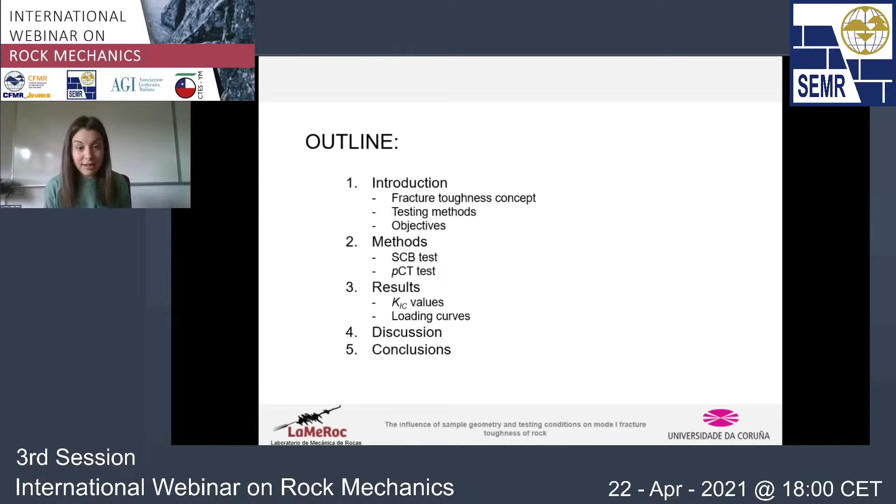This is the outline for today's presentation. I'm going to start with a brief introduction about the concept of fracture toughness, and show you a few testing methods to measure this property in rock materials. Then I will define the objectives of this work and describe the two main tests we have used in this study. Next I'll show the results, both in terms of fracture toughness values and the shape of the loading curves and their importance. I will finish by discussing these results and conclude with some highlights.

To introduce the concept of fracture toughness, we need to keep in mind that no material is perfect - all materials contain defects, and these defects or discontinuities exist at all scales. These imperfections can pre-exist in a material, like pores in rock, or develop during operation, like cracks. The presence of these defects produces a stress concentration that can cause the material to fail before we expect, before the critical strength is reached. In contrast to traditional approaches, fracture mechanics considers the presence of these discontinuities and introduces the concept of fracture toughness - a material property that measures resistance to the propagation of cracks, linking the size of a defect with the maximum stress that can be applied to that material.

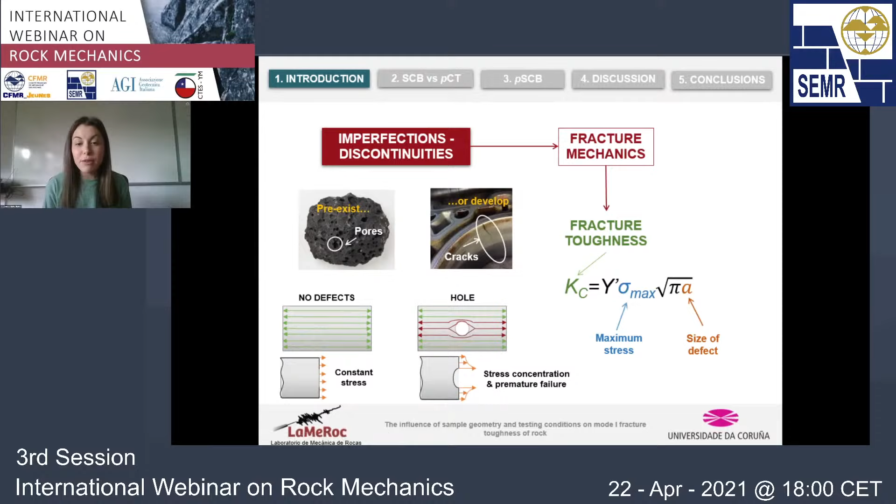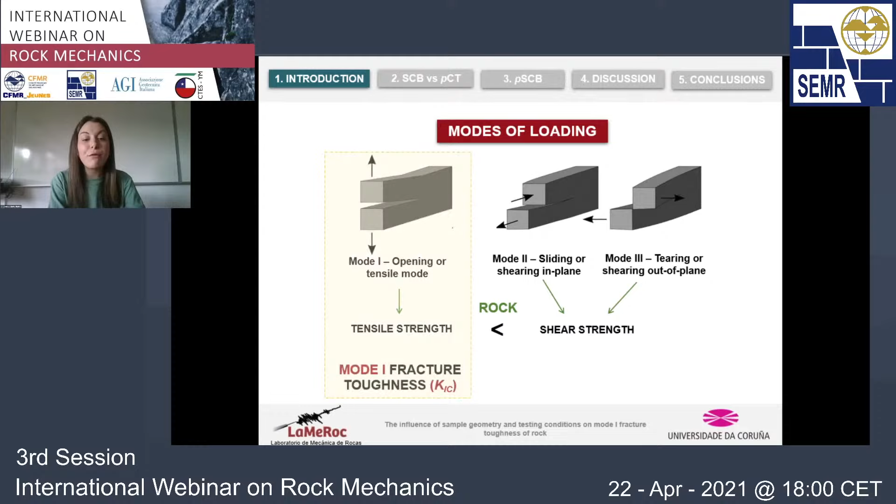In fracture mechanics, there are three modes of loading. The first, shown on the left, is mode 1, where the crack face opens perpendicular to the crack plane - for this reason it's also called the opening or tensile mode. In modes 2 and 3, the crack faces slide in the crack plane due to shear stress. But if we focus on rock, the material we are studying, the tensile strength is comparatively lower than the shear strength or even the compressive strength. For this reason, mode 1 fracture toughness is the most studied parameter in rock fracture mechanics.

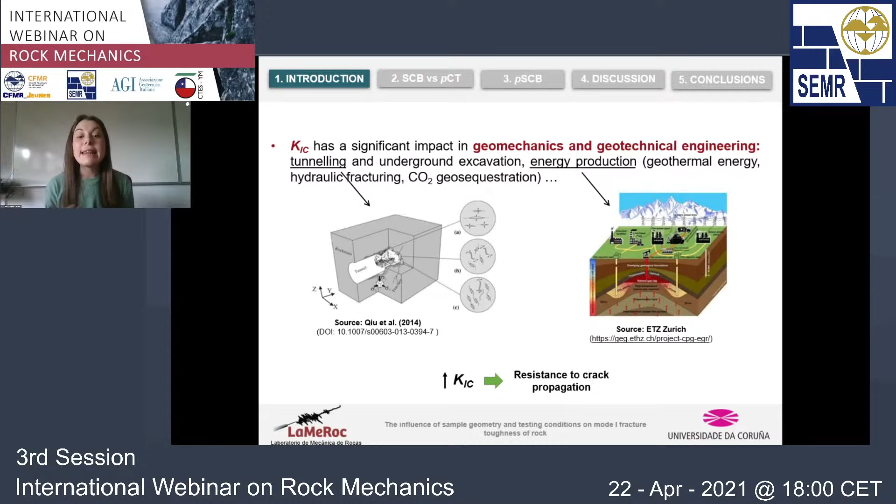In fact, this property is really relevant in many projects involving rock materials. We could mention the case of tunneling, or in the energy production field, geothermal energy, hydraulic fracturing, even CO2 sequestration. In all these projects, it's really important to assess the propagation of fractures, because in some cases it can be beneficial, but in most cases it can be harmful. So the higher the value of mode 1 fracture toughness, the higher would be the resistance to the propagation of cracks.

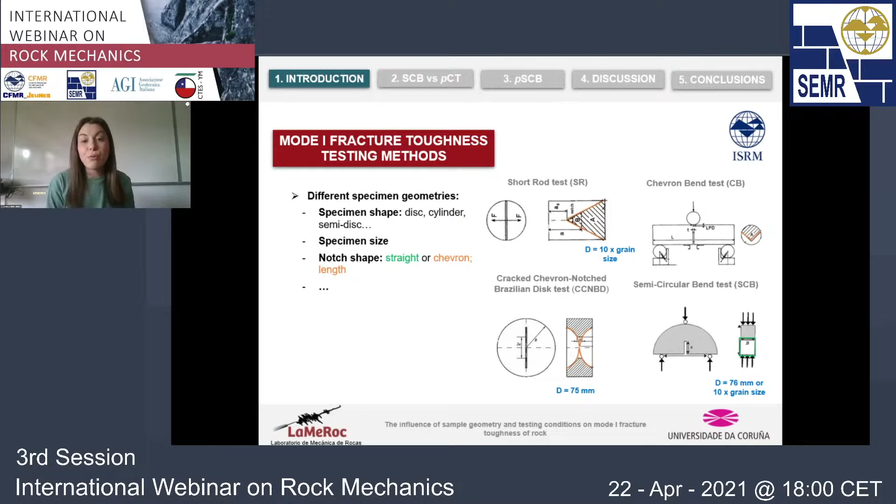We have a couple of cases of cylinders, we have a semi-disc, we also have a full disc. The size of the specimen also changes from one method to the other, and even the shape of the notch. We have one case with a straight notch, and in the other 3 cases what we have is a chevron-shaped notch.

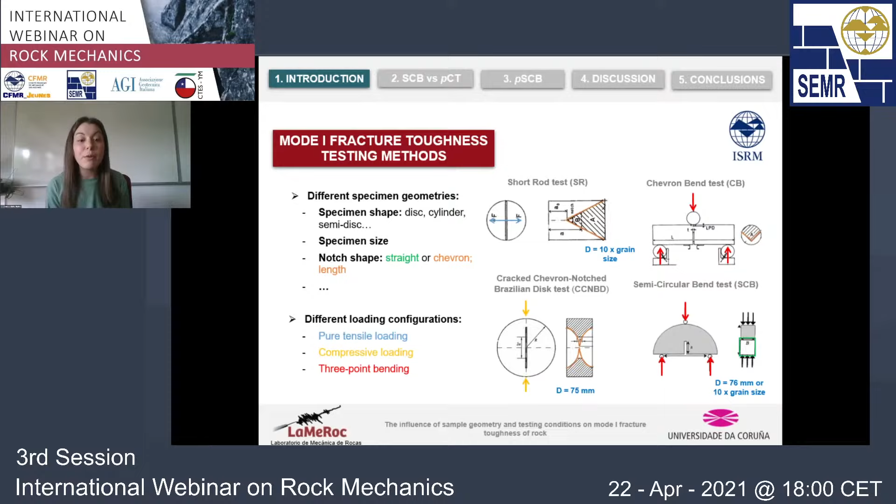Also, the loading configurations are different from one method to the other. We have 2 examples of 3-point bending, 1 case of compressive loading, and only one of these methods is performed under a pure tensile load, which is the case of the short rod.

But the question is, what is the effect of these factors on the fracture toughness that we measure? I have taken these graphs from a couple of works just to show you this effect. Here on the left, we are seeing the values of fracture toughness for a same material tested using different testing approaches. We see that there is a variability in the results, and that, for instance, in the case of the short rod, the values can be even double those of the cracked chevron notched Brazilian disc.

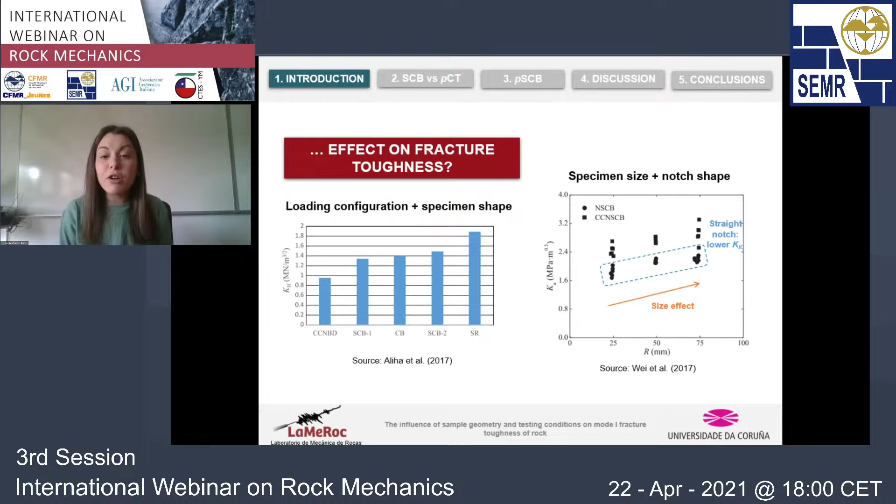We can also see, for instance in this work, that there is a size effect, and that we obtain higher values of fracture toughness as we increase the size of the specimen. And even the shape of the notch has an influence, with lower values being recorded for the cases in which a straight notch is cut in the sample.

So after seeing all of this, which are the objectives of this work? We will try to assess the influence of specimen size, but also the influence of the length of the notch. We will analyze the repeatability of the results, and we will try to answer the question of which factor has the greatest effect, the loading conditions or the specimen shape. So in this work, we have mainly compared two different testing methods, which are the SCB and the pCT.

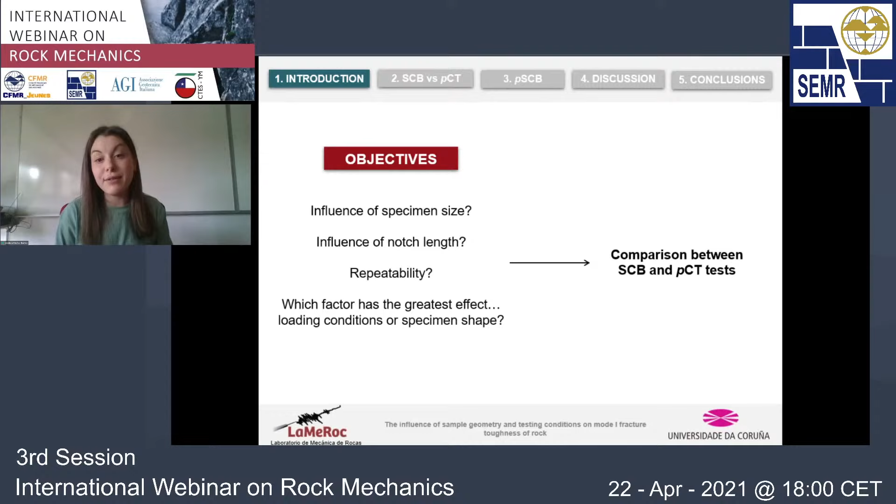So these are the two methods. On the left, we have the semicircular bend test, which is one of the suggested methods of the ISRM, as I have said before. In this case, we can see that the shape of the sample is a semi-disc, and that a straight notch is cut here on the center of the flat surface. This sample is loaded under 3-point bending.

But on the other hand, we have also used a different approach, called the pseudo compact tension test. In fact, this was the main topic of my thesis work, developing this new testing method. We developed this here at the Laboratory for Rock Mechanics at the University of La Coruña, together with the company Repsol, under a research project. In this case, the shape of the sample is a full disc, and we also have a straight notch as in the case of the SCB, but we cut here on the upper part of the sample a wider groove. This groove we use to deliver a pure tensile load to the sample.

So in both cases, we have used a straight notch, although with variable length to assess the influence of notch length. We have also kept constant the thickness to diameter ratio at 0.5, and we have used 3 different specimen sizes to assess the influence of the size of the specimen on this property.

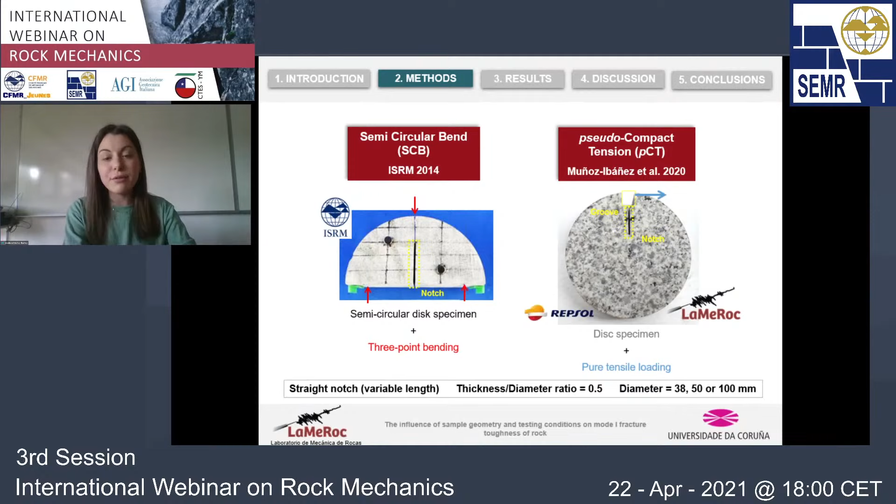This is the device that we use to perform the SCB tests. Performing these experiments is really easy. We place the sample here on these 2 supports, and with a third roller placed on top of the sample, we apply a compressive load.

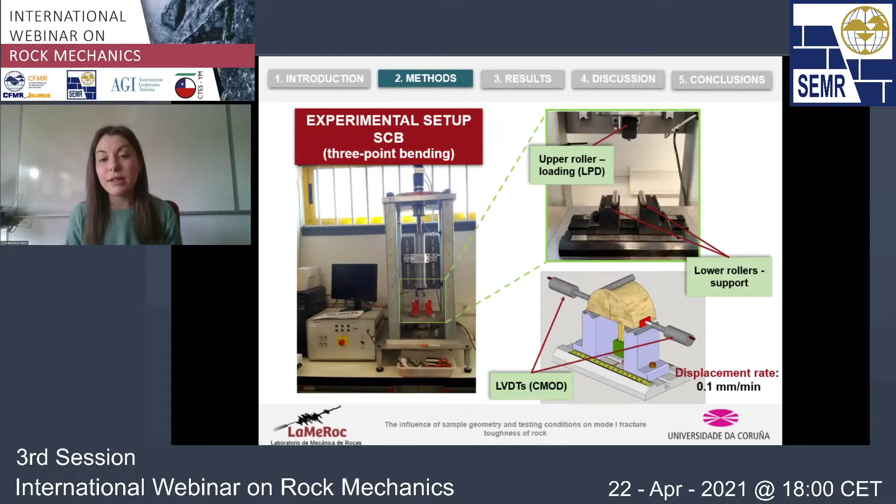So we have a configuration of 3-point bending. The movement of this roller on the top gives us the load point displacement. In this case, we measured the crack mouth opening displacement, not with a clip gauge, but with 2 LVDTs placed on both sides of the sample. For these experiments, we used a displacement rate of 0.1 millimeters per minute, which is low, but within the range of values recommended by the suggested method, to avoid any dynamic effect.

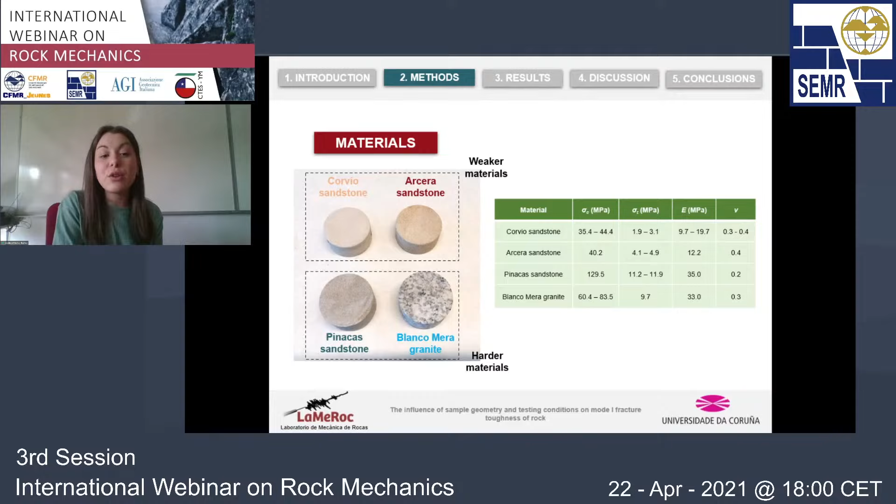We have used in this study 4 different rock types, 3 sandstones and 1 granite. Just keep in mind for the results later that the Corvio and Arcera sandstones are weaker materials, and that the Pinacas sandstone and the Blanco Mera granite are much harder materials.

These are just a couple of examples of the specimens before and after testing. We see that after the test there is a fracture that has developed. Maybe it's not that clear here on the SCB sample, but here we can see it clearly in the case of the PCT that there is a fracture that has propagated along the vertical plane.

For the PCT, we have also measured the crack mouth opening displacement. In this case we used a clip gauge for this. And we have also recorded acoustic emission activity using sensors placed here on the surface of the sample.

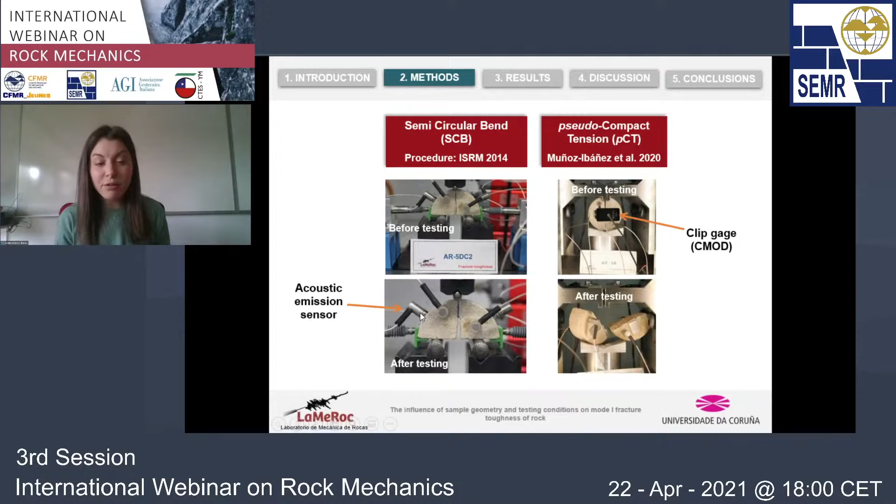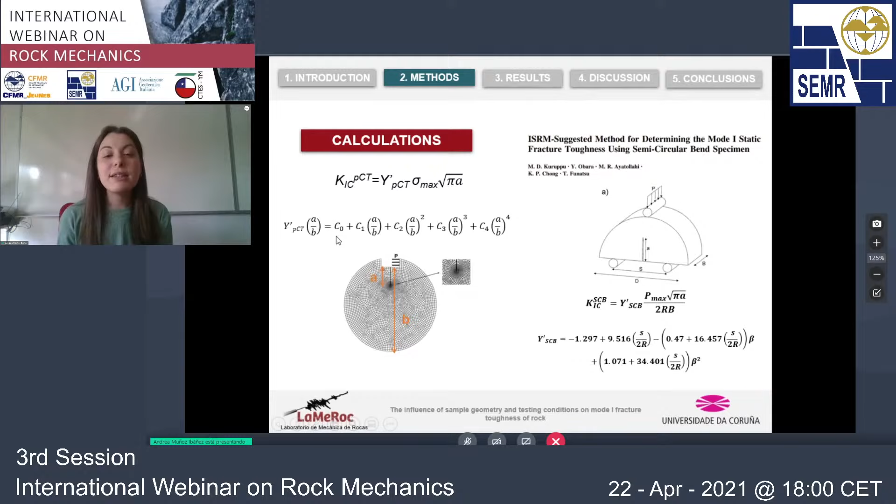But there is something really interesting about this, and it's that we also observed that there was a lithology dependence, that the effect of specimen size and the effect of notch length was not the same for the 4 lithologies that we have used. And it seems, at least apparently from the graphs, that the effect might be higher for the harder materials. But with this graphical analysis, we could also have a qualitative estimation of the influence of these effects.

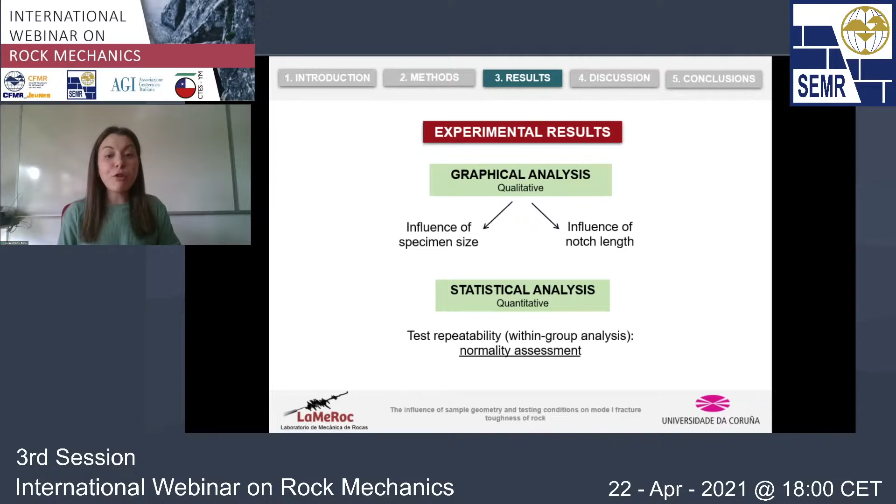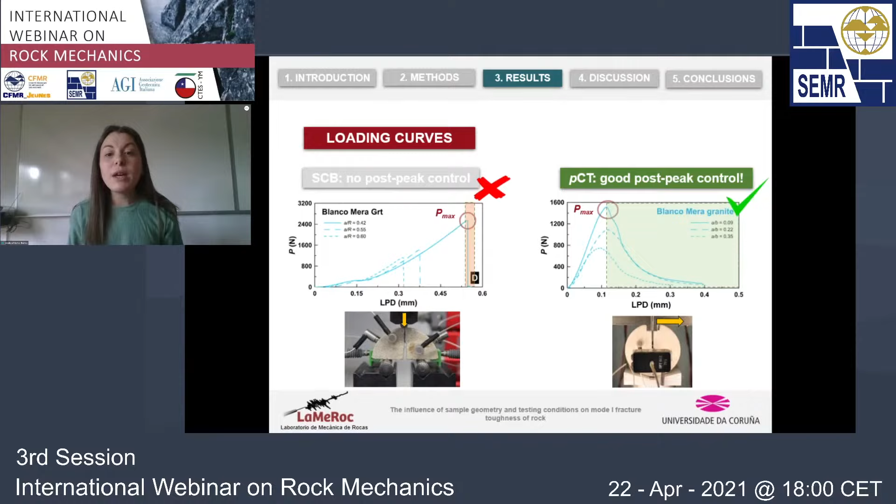On the other hand, if we take a look at the curves for the PCT, we also see that as this steel jaw here is moved, the load increases up to the peak. But then after this point, we have very good control on the propagation of the fracture. And we have to further move the steel jaw to have further fracture propagation. So from this experiment, we can have much more information regarding the propagation of the fractures than in the case of the SCB.

So we are testing on one hand a semi-disc under 3-point bending, on the other hand a full disc under pure tensile conditions. So we wanted to know which factor had the greatest effect on controlling the post-peak behavior: is it the loading configuration or the shape of the specimen?

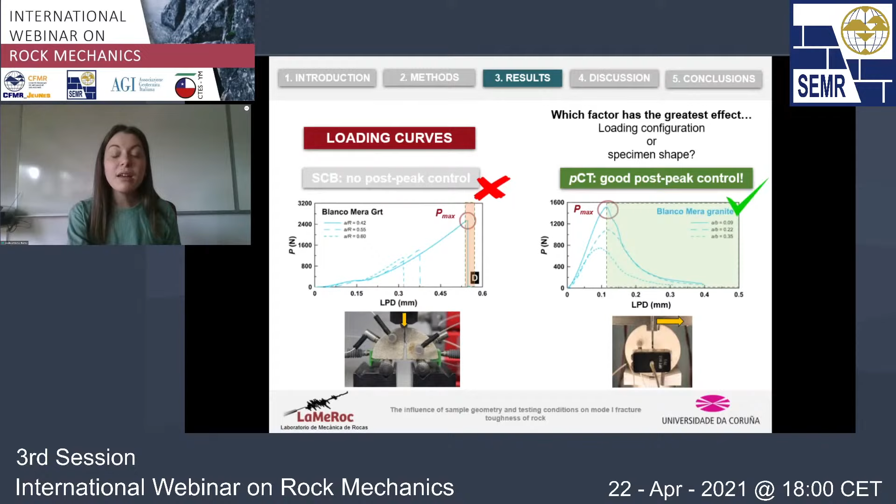So to try to answer this question, we have introduced quite recently a third testing method, a third specimen geometry. We have called this one the pseudo semicircular bend test, and we can see it as a combination of the other 2 methods. You can see that the shape of the sample is a semi-disc, like in the case of the SCB. We also have the straight notch, but we got, like for the PCT, a wider groove in the upper part, so that this semi-disc can be loaded under pure tensile conditions.

So for this study, we have used straight notches with variable length to assess the effect. We have kept constant, more or less, the diameter of the samples, and we have also kept constant the thickness to diameter ratio at 0.5.

This is just an example of the sample after testing, in which we can see that it has failed and a fracture has propagated. Following the procedure for the PCT, we had to derive also an expression for the dimensionless stress intensity factor using the finite element method.

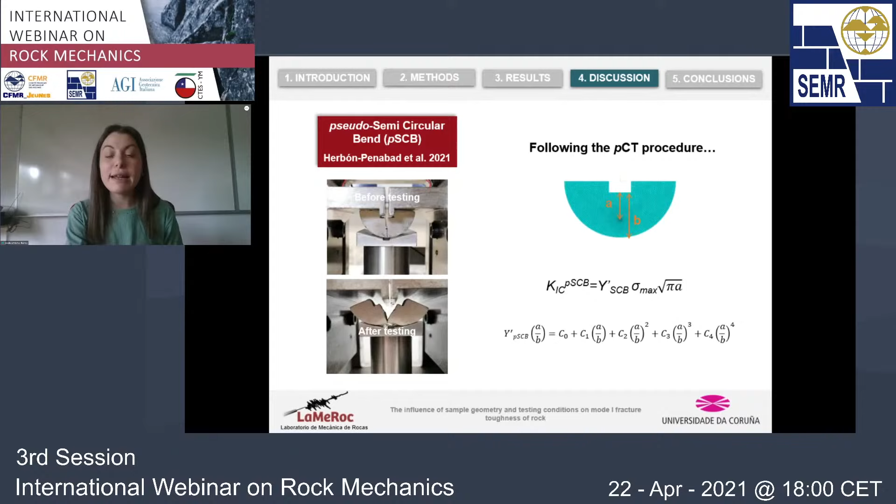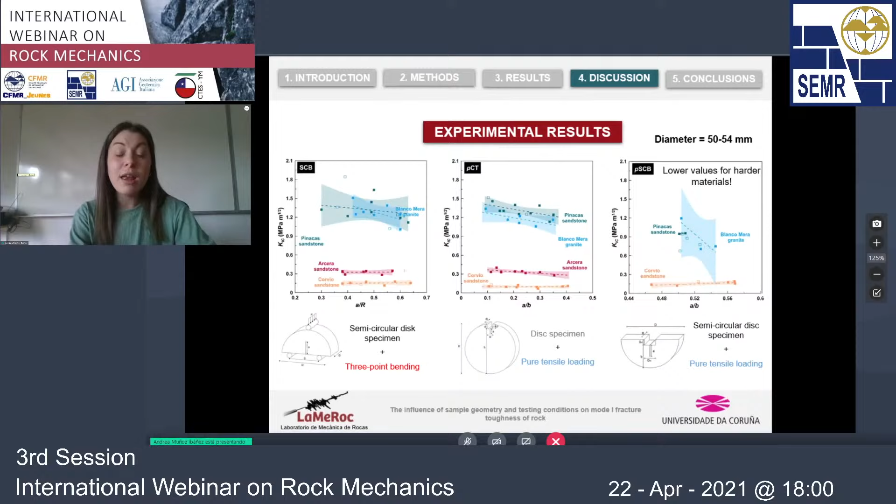What we observed was that, as happened in the case of the PCT, we also had here a very good control on the propagation of the fracture. So as we expected, the loading conditions are more relevant than the shape of the specimen when controlling the propagation, the post-peak control. And why is this happening?

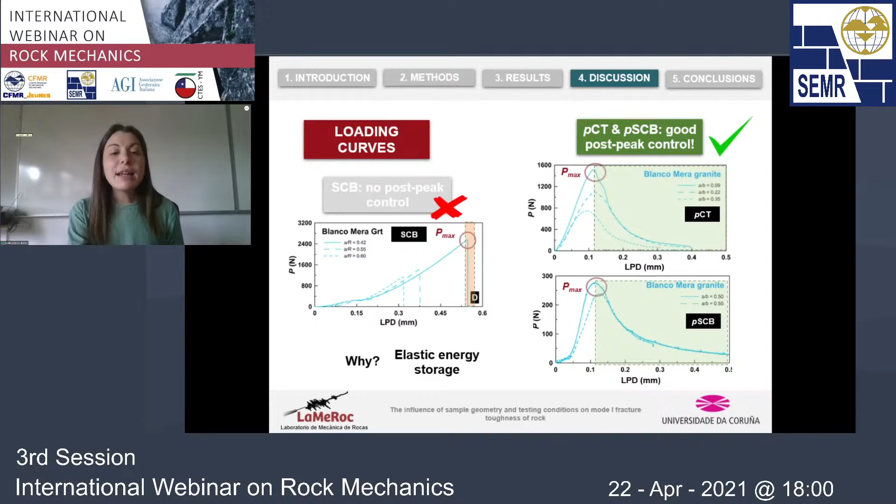We think that it's due to the energy storage that occurs in the case of the SCB before the peak load. To check this, we have used a different material. We have used, in this case, methacrylate, and we have performed the three experiments using these three testing approaches.

We could see that, as happened in the case of rock, we had no control on the SCB, but in the case of the pCT and pSCB, although the failure was really brittle, we still had some control on the propagation of the cracks.

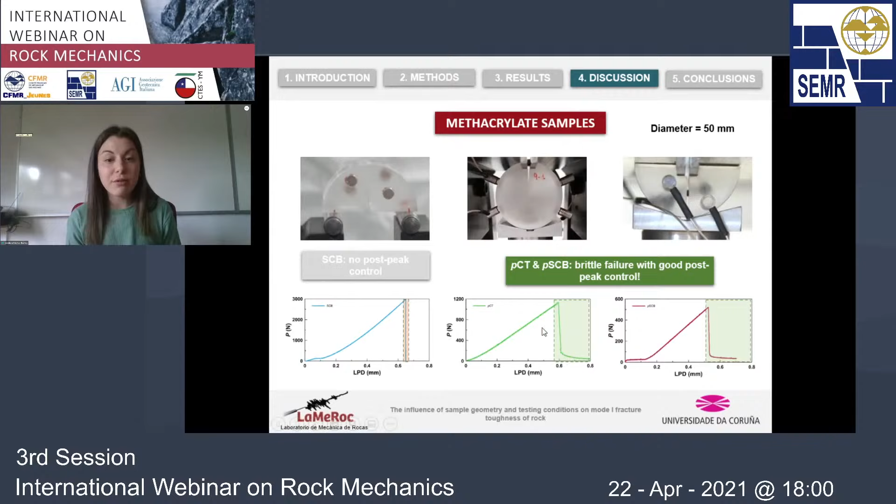But the fact of using methacrylate to perform these experiments had also a second intention behind it. Methacrylate has a very useful property called birefringence. Thanks to this property, we could perform a photoelastic stress analysis of the sample.

Using this simple testing setup, this is the experimental device designed for the PCT. Here are the steel jaws, and we placed the sample here as usual.

What we did was use a source of white light on one end, and placed a camera on the other end. On each side of the sample, we placed a couple of polarizers. This is the sample before testing, and this is how the sample looks when we don't use a polarizer, just the white light behind.

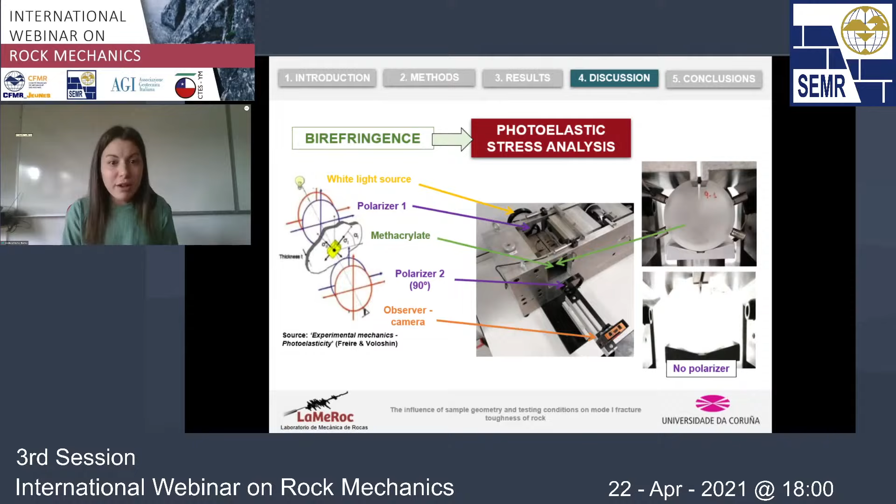But what happens when we use the polarizer? I have a video here. You are going to see on this corner of the slide how the loading curve, how the load increases. And here on the sample, what we are going to see is a color pattern, and each color reflects a different level of stress.

The speed of the video is like 16 times higher than it should be, but we see that the load increases, that the stress is concentrated here on the contact with the jaws and the notch tip, and that at some point the fracture propagates. We have very good control on this fracture propagation, and the stress is concentrated at the level of the notch tip, the crack tip, and is released here on both sides of the sample.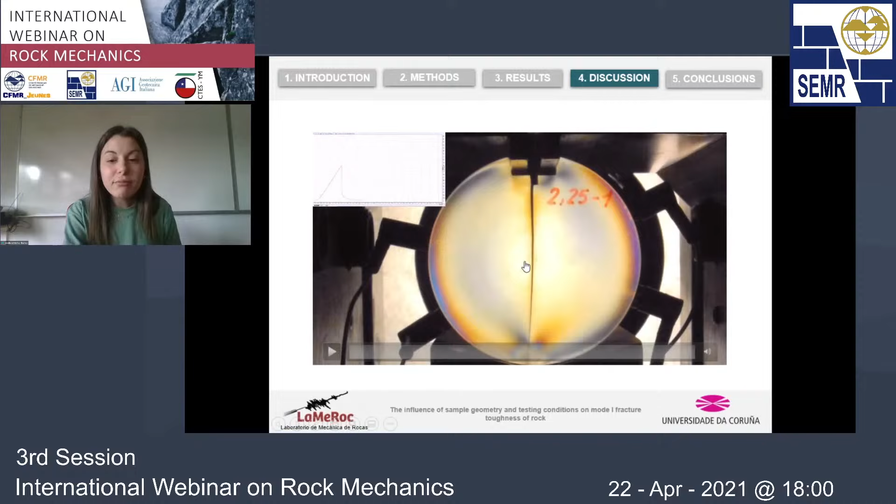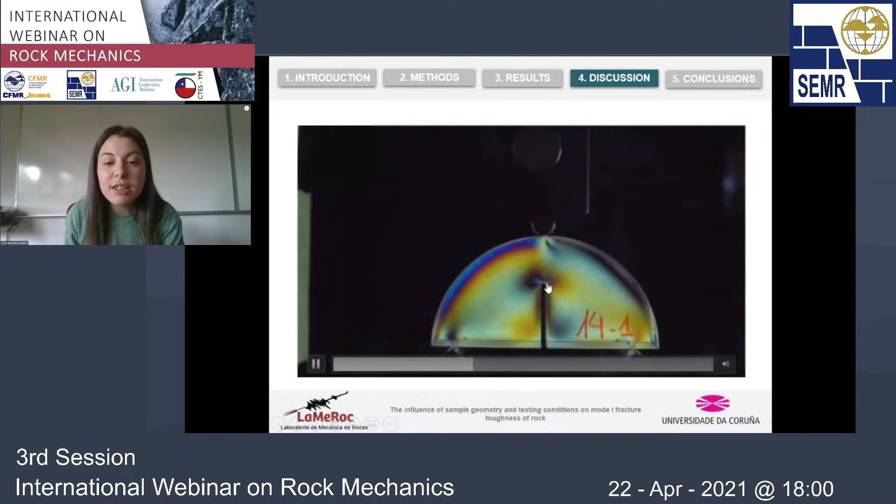We have done this also for the SCB. In this case, as the load is increasing, we can see that there is a stress concentration at the notch tip, but there are also huge stress concentrations at the contact with the rollers. So in this case, there is a lot of energy being stored in the sample.

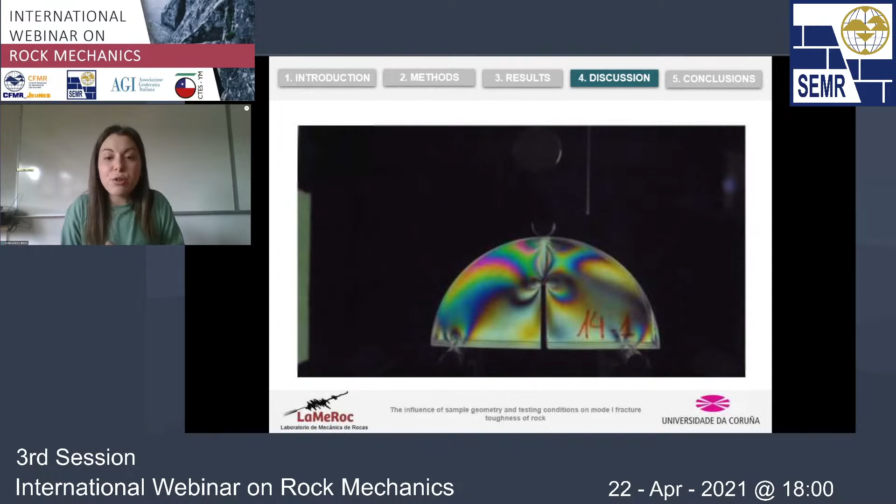So when it fails here, what we observe is that all the energy is released suddenly, and we cannot control the propagation of the crack.

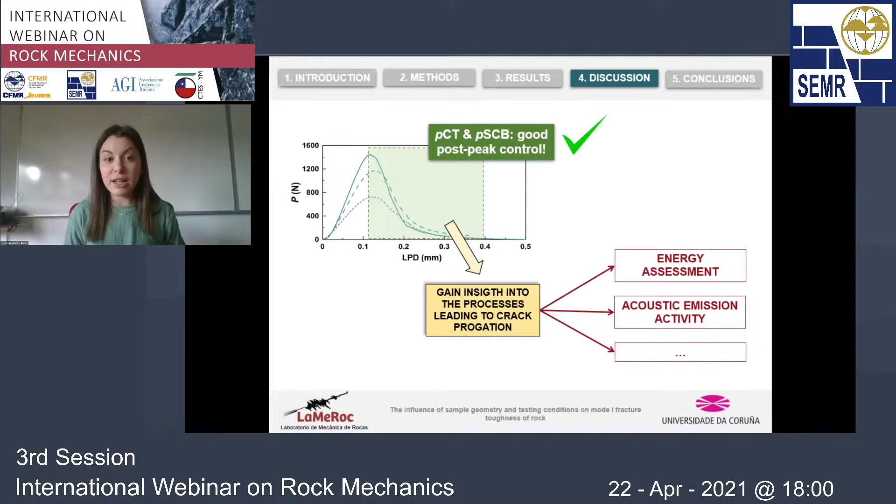The fact of controlling the post-peak can be really useful, because we have here a lot of information that we can use to gain insight into the processes that lead to the propagation of the cracks. In this study, we have used this information to perform an assessment of the energy, and also to analyze the acoustic emission activity on the post-peak. But this can have many other applications.

Thanks to recording the complete load displacement curve, we could compute not only the area here, the energy needed to initiate the crack before the peak load, the pre-peak energy, but also the post-peak energy, which is the energy needed to propagate the crack. By plotting one magnitude against the other, we observed that in general there was a lower energy needed to initiate the fracture than to propagate it.

Since we also measured the crack mouth opening displacement, by comparing the shape of the curves for plotting the load against the load point displacement or the crack mouth opening displacement, and computing the area below, from the total energy measured in both cases, we observed a very good correlation between these two magnitudes. So for the PCT, there won't be a need for using transducers for measuring crack mouth opening displacement as long as we apply this correction factor. This can be really useful when testing small size samples where we don't have much room to attach the clip gauge.

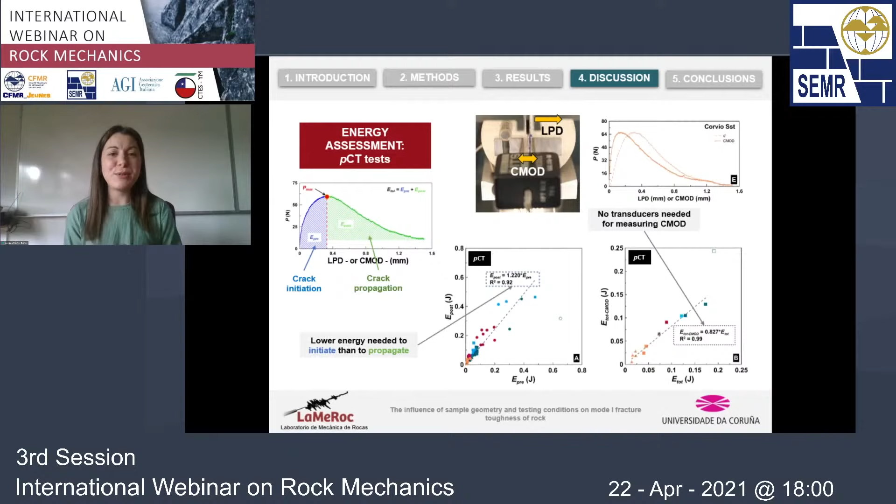We have also recorded acoustic emission activity using these sensors on the surface of the sample. We have recorded many time-based acoustic emission parameters, the most typical ones being amplitude, duration, and energy. We have also computed a couple of ratios called the average frequency and the rise angle, using these parameters. If we plot these magnitudes on a graph, we can assess if the acoustic events are being produced by tensile cracks, shear cracks, or if there are mixed mode conditions.

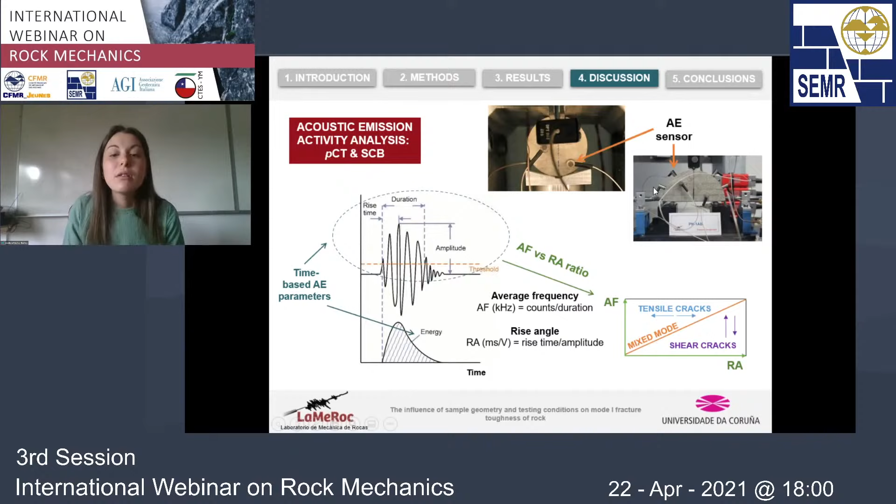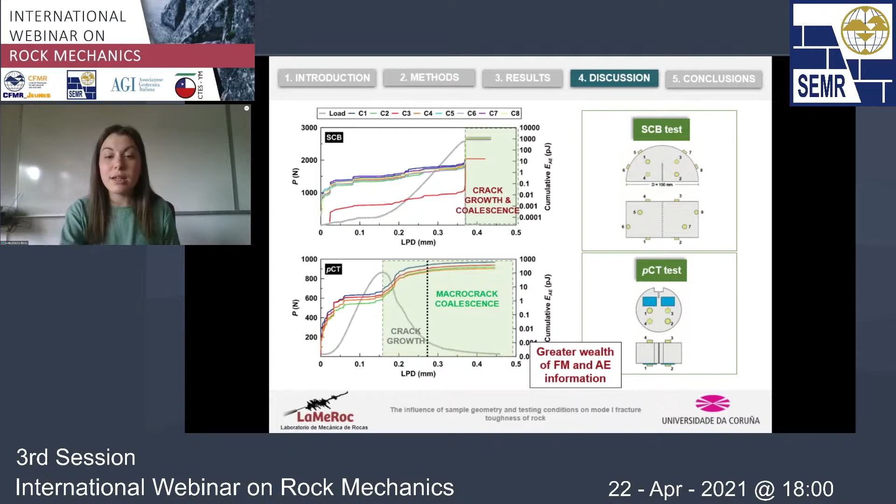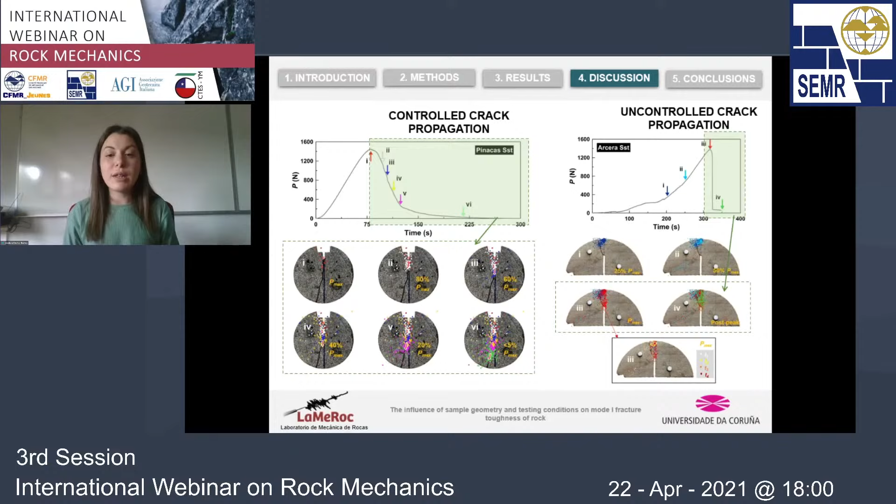In the case of the SCB, we don't have as much information, and we observed that from the beginning of the experiment there is a huge concentration of acoustic events on the contact with the top roller, and that when the fracture propagates, all the events are located along the ligament plane.

As I said before, we have used the average frequency and the rise angle to classify events into tensile or shear cracks or mixed mode. We saw that the major part of the experiments were performed under pure tensile conditions, but here at some point, shown on these graphs in green and purple, these events are more located on this line, marking the threshold between the two modes. We observe that at this point the events are located on the line, and some events even fall in the shear field. So although the experiment is performed under pure tensile conditions, we still have a state of mixed mode.

This is due to the propagation of the cracks, which don't always follow the vertical plane, but try to avoid the higher density grains, so we can have mixed mode conditions. For the SCB, we observe something similar: up to peak load all the events are in the tensile field, but at crack propagation, at specimen failure at peak load, the events are also recorded under mixed mode conditions.

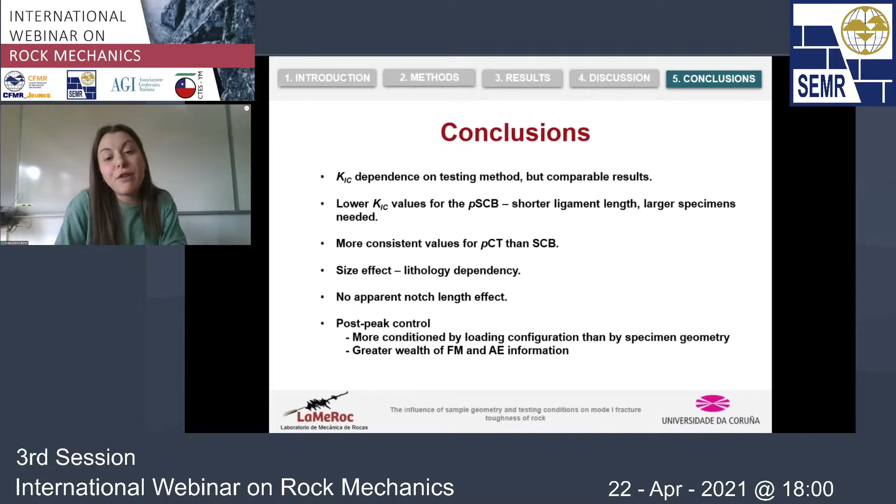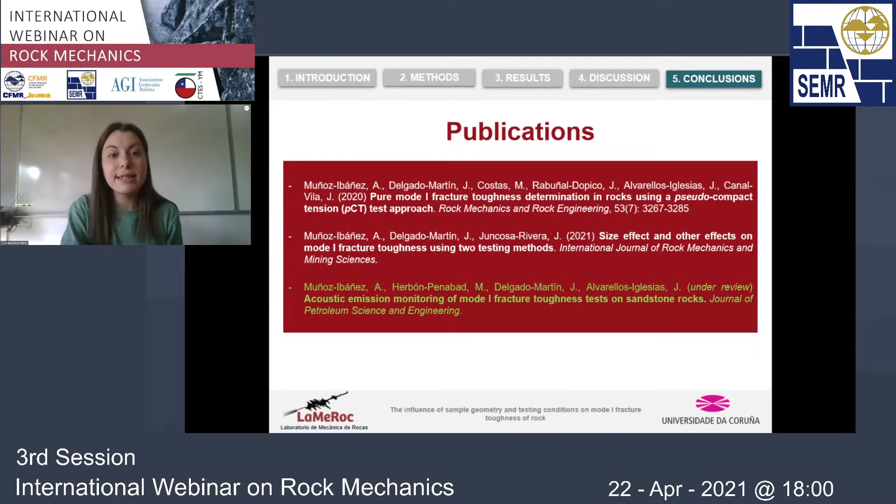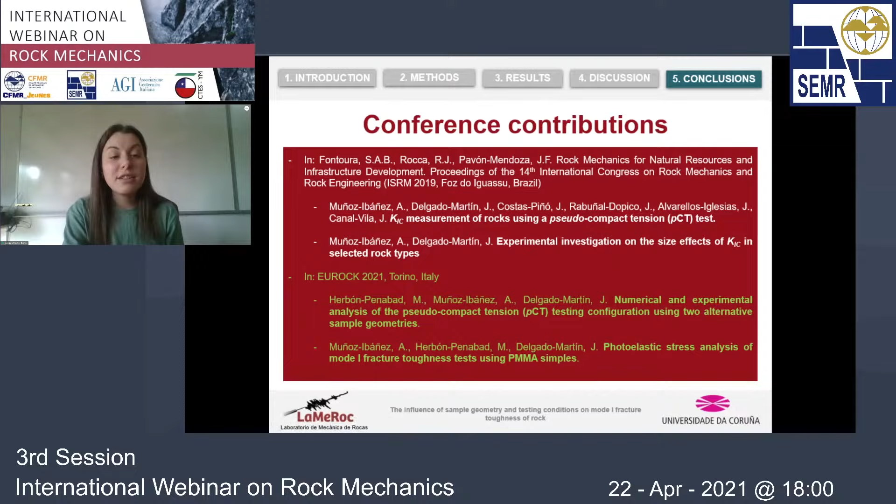So in case anyone is curious about this work, these are some publications. The one on the bottom, the green one, is still under review. And the second one, we are very happy because it was accepted yesterday. So it's not published yet, but if you are curious, I can provide you with the text. These are some conference contributions too. Two of them, we expect to present at EUROCK 2021 this year. And that's all. Thank you so much for your attention.

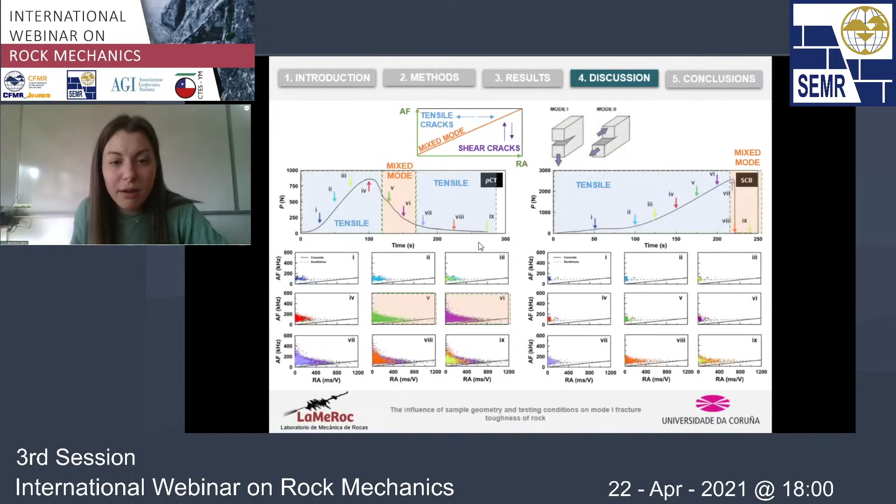Could you please explain what kind of sensors did you use for recording the stress and displacement? Strain gauges, transducers? For the PCT, we are measuring the stress.

There is a load cell here, in the case of the PCT a 50 kilonewton cell, and we measure the load using this cell. For displacement, we have two LVDTs placed on the upper part of the sample, on the device.

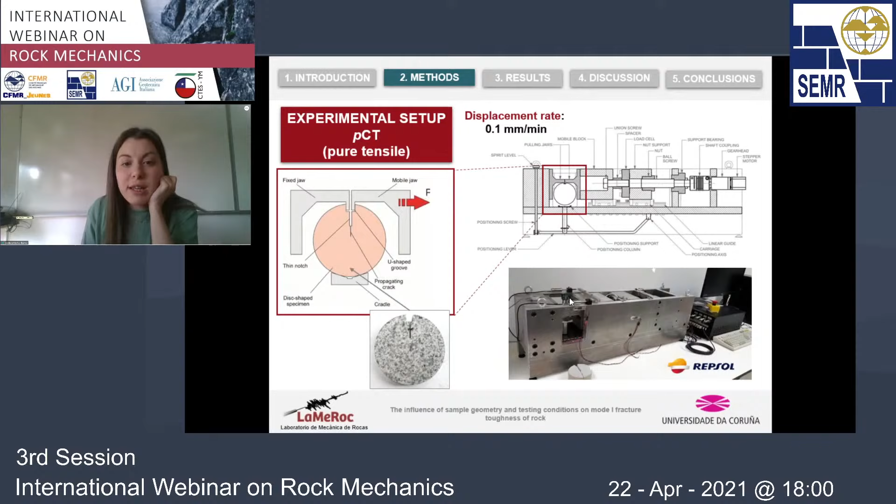For the SCB, we have a load cell on this part of the device, and the displacement of this roller is given by the rotation of the motor. This ball screw converts the rotation of the motor into linear displacement, and we can measure the displacement this way.

I have a question. Do you know which are the best conditions for testing with the SCB method in terms of sample size, notch length, and displacement rate?

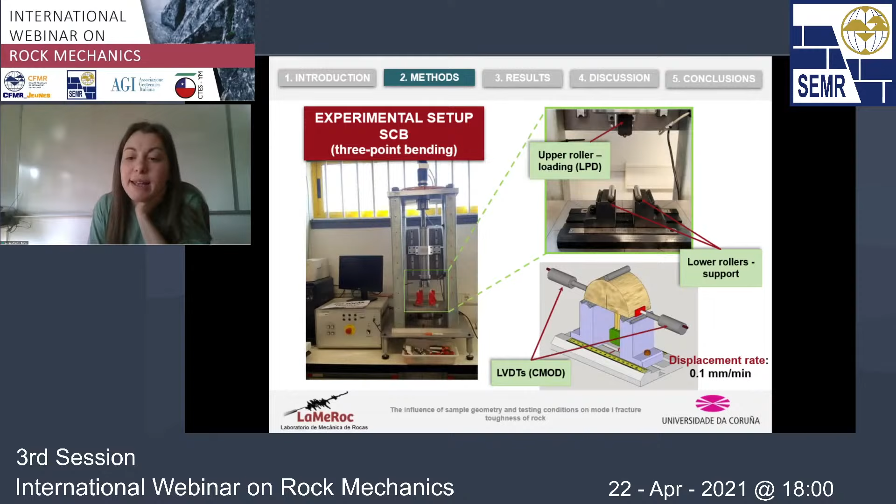For the SCB, I would say it's all described in the suggested method. In terms of displacement rate, they suggest using a slow displacement rate, lower than 0.2 millimeters per minute. I think that's the value given in the suggested method.

For the notch length, they suggest using a notch length ratio between 0.4 and 0.6. For sample size, they suggest using samples larger than 76 millimeters in diameter.

So in this case, we can see it here. We have used specimens smaller than this size, 38 and 50 millimeters in diameter, which are below the recommendation of the suggested method, but we used these values to compare them with the pCT.

For the SCB, I would suggest using larger specimen sizes, because from this statistical analysis, we observed that for weaker materials, we needed 100 millimeter samples to obtain values conforming to normal distributions. For the pCT, the specimen size seems less relevant, at least for the harder materials.

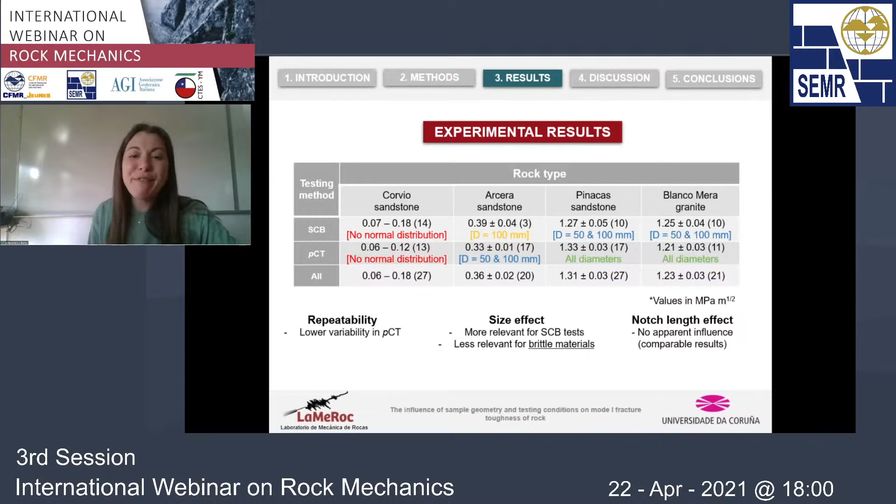No, sadly, we have the only device, I think, worldwide. We have performed experiments also for other companies, apart from Repsol, using the device. So there is no other equipment elsewhere.

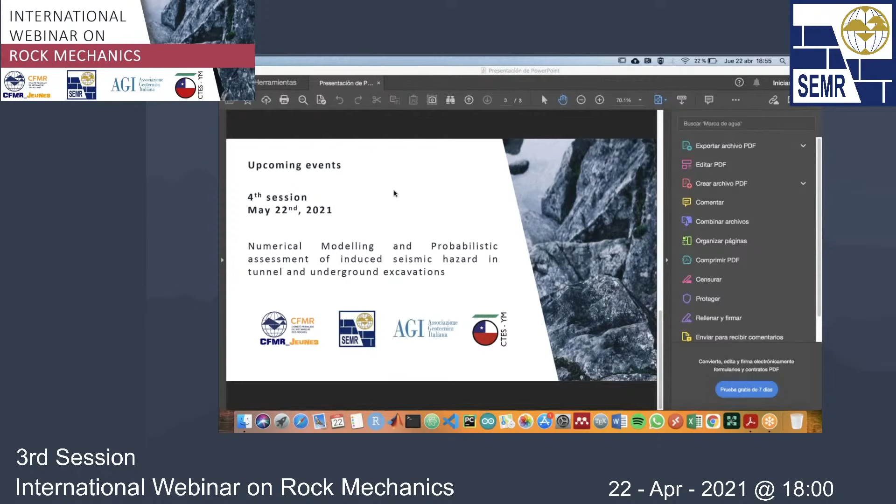Thanks, Mauro, thank you. Thanks a lot. Thank you so much, see you. Bye, bye. Bye, Andrea, bye, bye, Nacho. Rock Mechanics colleagues, thank you very much, bye-bye.